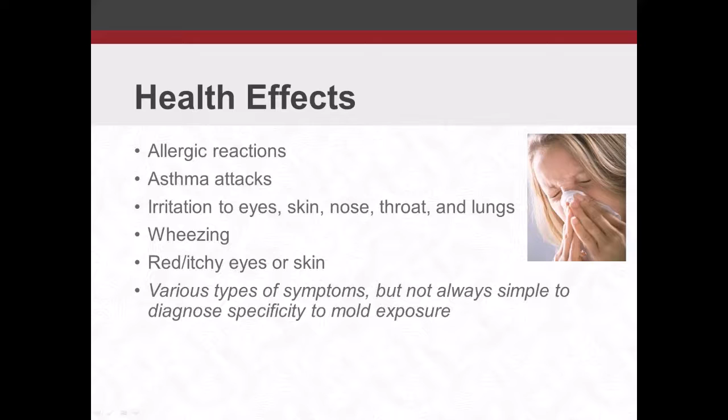So what are the common sources and causes? Mainly when looking at where you're going to get mold developing from, you want to take a look at the structure itself.

The number one factor is your building envelope, where you have that direct contact between your building systems and the outdoor environment, where you're going to have rain, precipitation, humidity, and all those things that can cause moisture or water infiltration. So obviously roof leaks, leaks at windows, doors, exterior finishes, things like that. Your foundation, if you have poor drainage or some infiltration to your foundation walls, that can lead to moisture and eventually a mold issue.

Or like your additions and repairs, those are common areas. Sometimes an addition is constructed on a building, so you've got the old structure, the new structure, and all those new connections where everything connects. If you get some differential settlement on that, you might develop leaks pretty easily on those areas of additions. So a lot of that depends on how things are constructed and how they're maintained.

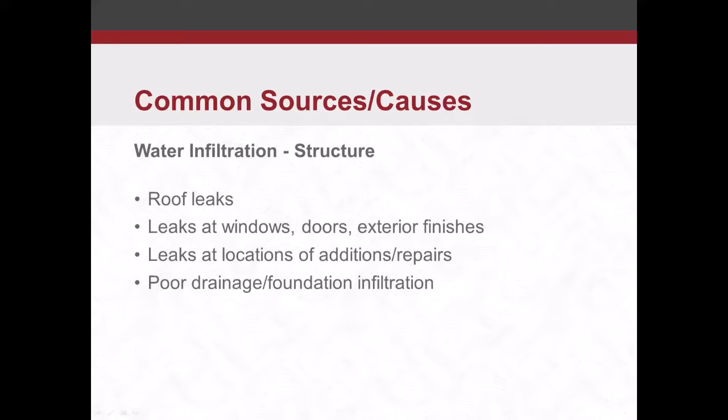Something that you can control based on, okay, if you develop issues, what do you do to fix it? Proper repair, proper maintenance, you can control those things. But there obviously is going to be a cost factor. You develop a roof leak, you replace a roof, that's going to cost. So definitely have to be aware of what we need to do to take care of the situation, and you got to be cognizant of that cost associated with it.

Another thing with water infiltration is what's inside the building: building systems, fixtures, furnishings. When you have pipe leaks, whether it be your mechanical hot water system pipes or your domestic water pipes with plumbing, obviously those can leak at unknown times sometimes. Those things are harder to control, but the main thing, if you do notice it, fix it as quickly as you can. Try to keep any water and moisture leakage at bay, and keep that mold from becoming an issue.

Also your fixtures, your toilets, sinks, tubs, washing machines. If you're in a building where you have water fountains, things like that, those can be a prime area for springing a leak. Refrigerators with water lines - I've seen a basement get totally flooded out when the owner was on vacation and the water line cracked and just leaked all over the basement. One little water line that feeds your refrigerator floods the whole basement out.

So there's extensive mold remediation on that project, and just some of those little things you don't think about, especially when you're leaving town. Okay, yeah, everything's good to go, lights are off, we've got everything buttoned up - but what about your refrigerator water line? You just don't think of things like that.

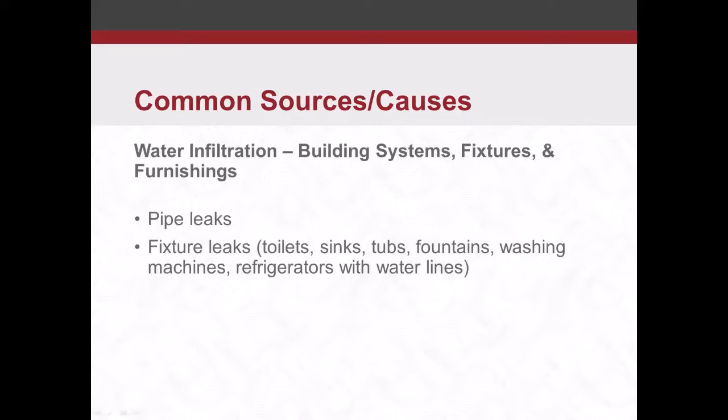Another thing with water infiltration, things that you can't necessarily control, is the forces of nature - hurricane areas, tornadoes, things like that bring water and wetness into a building. You can't really control it, but obviously it's going to be something that would present a problem for moisture and water infiltration and mold concerns.

And then you have some other things that are a lot more controllable with human error, but things happen, people make mistakes, and you have to have corrective action for that. One thing would be if wet items are brought inside - you're outdoors on a rainy day, you got wet clothes, you bring them in, take them off, leave them in the corner in the bathroom or laundry room, and those wet clothes don't dry immediately. So they sit there, they might get other building materials wet, and next thing you know, you have some mold concerns in that localized area.

Also, flooding events don't necessarily have to be from natural disasters. They could also be from human error, whether someone put something down the toilet and it overfilled and didn't get taken care of promptly, or you left the faucet on and it overfilled, drained down into below your sink, below your floors, into your subfloor. That can definitely make a mess in a hurry. So human error is also something you have to watch out for with this water infiltration.

Another item I got in there: improper use, placement, or installation of items with water inside. So people might get the idea, let's put a hot tub inside, let's put a large aquarium inside. But if you don't install them correctly, don't maintain them correctly, and don't have the right place for them that can control humidity and condensation, you're just asking for a disaster. So whenever you get the idea of doing something like that, you want to make sure that you have everything under control, and the area you're putting it in is properly set up to handle that.

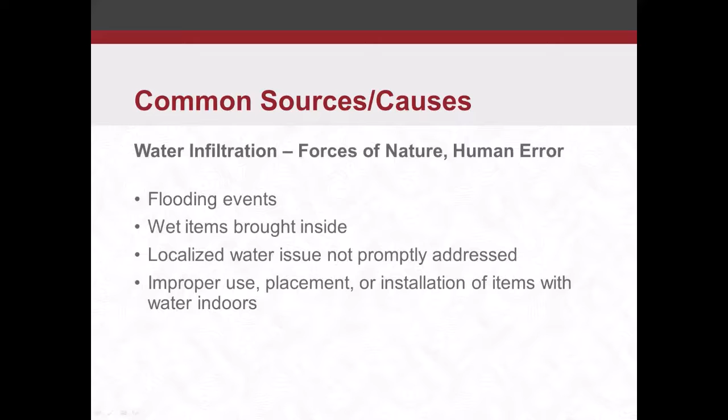Another common source is humidity and limited ventilation. A lot of this depends on the region where you live or where your building is. Certain areas of the country have a lot more humid days than others. So if you're living in conditions with high humidity over an extended period of time, you want to have buildings that are properly air conditioned and can reduce that humidity level inside and maintain it at a reasonable level. Ideally, you're looking at a relative humidity somewhere in the 30 to 50% range.

Those are ideal conditions. You get too low, it becomes a comfort issue - dry skin, chapped lips, things like that. So you don't want to be too low. You want to have a little humidity, but you don't want to be too high either, because high humidity is going to get mold growing. Once you get around 60%, that's when you get those ideal conditions for mold to grow. So 30 to 50% is ideal, but definitely try to keep it under 60%. If you run dehumidification systems and units, try to maintain it below that 60% level.

The problem with high humidity is usually it's coupled with limited ventilation - that's where you get some serious issues. If you have an attic area and it gets humid up there without proper ventilation, you're going to see your wood materials, your roof decking materials develop mold and mildew, because you have that limited ventilation combined with high humidity conditions.

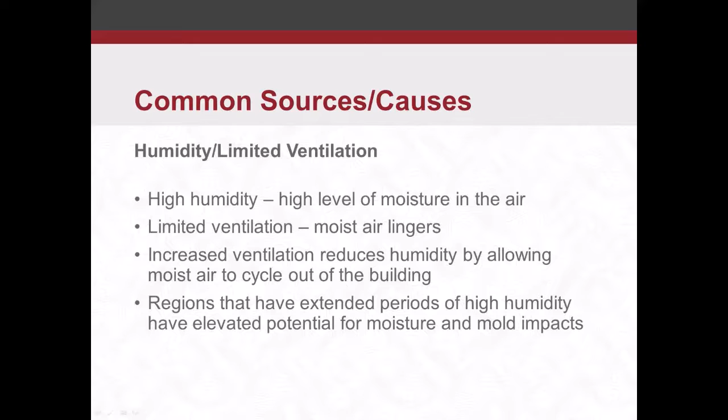Another source is condensation. Condensation is basically when your water vapor becomes a liquid - you get warm air colliding with cold surfaces, and then water droplets form on those cold surfaces. That all occurs due to your dew point temperature - the temperature the air needs to be cooled to in order to achieve a relative humidity of 100%. So your air becomes saturated, and that water vapor needs a place to go and form water droplets, condensing into liquid form rather than vapor form, and that's when you get an issue with condensation.

Materials in the building become lower than the dew point temperature, and you get water droplets forming on those. You're probably aware of seeing this in different scenarios - glass, metals, things like that, which naturally have a lower temperature than other materials. You see the condensation on those types of surfaces first.

It may not be an issue with mold growing on glass or metal, but those water droplets - say you've got a window unit with a wood frame - those water droplets are eventually going to make their way to the wood, and obviously your wood frame is going to be a little bit more susceptible to mold, and that's where you're going to see some mold and mildew type scenarios crop up.

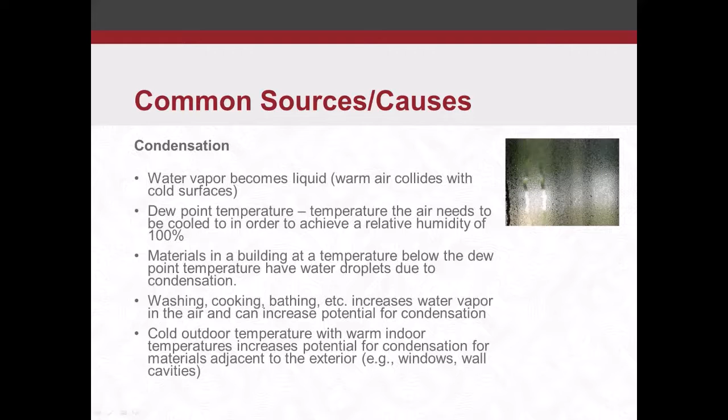Another source is plants and soil that you might have indoors. Indoor plants are good to an extent - you might have one or two plants in a room, office, or bedroom, and that's good, it helps CO2 levels and all that. But when you get to a point where you have 10 or 12 plants in a room, that's probably not a good scenario, because you've got a lot of these living plants in your area that can have decomposing leaves, and they can have issues with the soil and all that.

When you're looking at plants, there are a lot of sources for which mold or fungus can grow - one being overwatering. If you overwater a plant, all that excess water is just a good source for mold and fungi to soak up and grow. If you have poor drainage out of your plants, if you don't have some holes in your plant pot so that excess water can flow out, then it just creates that breeding ground there.

Also, decomposing leaves on a soil surface. If you don't clean out the dead leaves every now and then, those can decompose and create a mold growth issue. So you want to keep an eye on those plants if you do have them in your indoor environment.

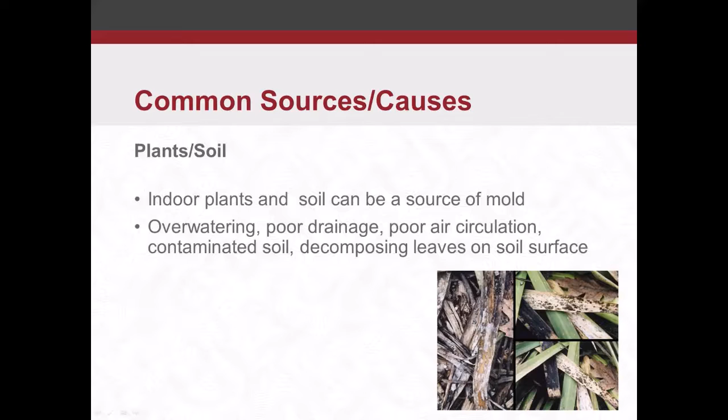So as far as once we do have a source, where do we typically see mold issues? Commonly, we're looking at locations that aren't readily exposed to view. You don't see them every day, out of sight, out of mind. Things happen behind a wall, above a ceiling, down in the basement, up in an attic. You're not really looking for it every day.

Or areas where you're not routinely cleaning or maintaining. You might have dust, debris, so a little more food source for mold to grow. Or you get mold spores in an area, you clean them up routinely, you might not have an issue. If you don't clean them up routinely, you get a little dampness, then you have an issue.

Or areas with poorly conditioned air. That's very common as well. You don't have that good air circulation. The humidity builds up at different periods of time, and you get the issues with mold, the potential issues.

So we're looking at pipe chases, wall cavities, attics, basements, crawl spaces, mechanical rooms. Not only are they maybe not necessarily cleaned and maintained all the time, but also they're warm. If you've got a boiler system or furnace system, they're going to produce heat. So now you've got high temperatures. If you introduce some water, condensation, humidity in there, you've got a good breeding ground for mold.

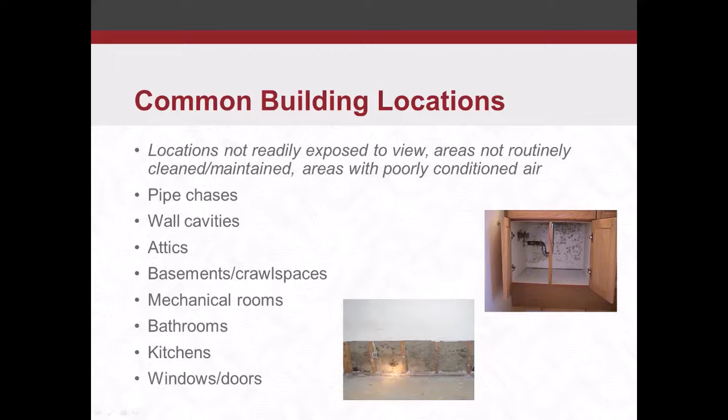So that brings us to question number 1.

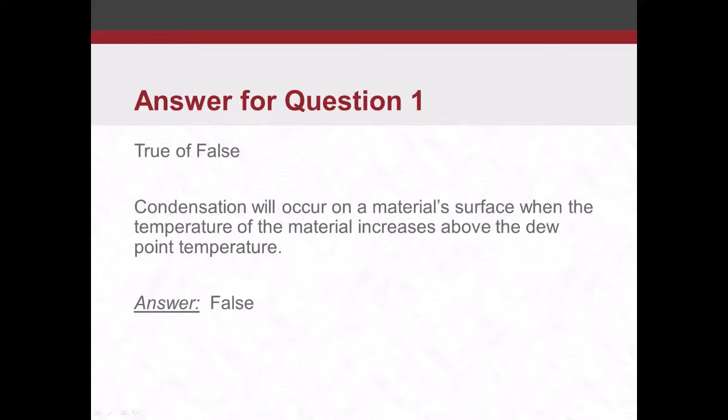Cheyenne, please continue. Okay, question number 1 was true or false: condensation will occur on a material surface when the temperature of the material increases above the dew point temperature. That is false. It's when the temperature is below the dew point temperature.

All right, so when we look at trying to control or mitigate mold, or have general concerns with mold, where do we look to address these issues? What guidelines do we have available to us? On the federal level, there are a lot of different agencies that have prepared guidelines for mold-related effects. OSHA has some worker and employee protection type scenarios, so they have guides for mold.

The EPA has some guidance. The IICRC, Institute of Inspection, Cleaning, and Restoration Certification, they have some guidelines. New York City Department of Health was one of the first to actually come out with guidelines for addressing mold in buildings. They were a precursor to a lot of other guidance that came out after that.

But what you see on the federal level is a lot of guidance, just providing some helpful information for the end user to try to keep mold from becoming an issue, and to try to protect themselves. There's nothing set in stone. There are no regulations that say this is what you have to do, or this is the standard you have to clean things up to. There's none of that, and there likely never will be.

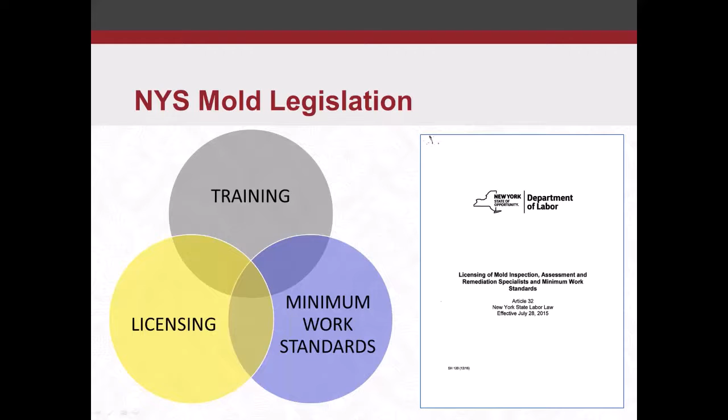So the New York State mold legislation defines a mold project as mold remediation, mold assessment, or mold abatement of areas greater than 10 square feet, but it does not include routine cleaning or construction, maintenance, repair, or demolition of buildings, structures or fixtures undertaken for purposes other than mold remediation or abatement. So what that means is, if you're hiring someone to do specifically mold remediation or mold assessment, this legislation applies. If you're doing a renovation project and they happen to find mold in there, this doesn't apply.

The contractor can remove that mold. It doesn't have to be a licensed contractor. They can remove it and continue on with the renovations. This doesn't really apply. You can write into a project that you want it to apply, and you still follow all these requirements, and that's fine. But in the run-of-the-mill case, this legislation only applies if you're designating the project specifically for mold remediation and hiring someone to do that.

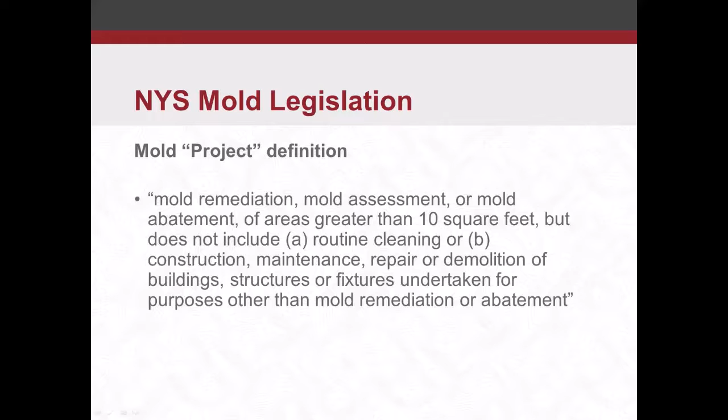So when we talk about minimum work standards, they define minimum work standards for the assessment, the remediation, and the post-remediation clearance. On the assessment side, the end goal is to have a mold remediation plan. The mold assessor does your assessment, so they're licensed as an assessor. They come out, look at the area, do the visual, do the full assessment, and come up with a mold remediation plan to give the owner, saying this is what should be done to address the mold at this building.

So the mold remediation plan, the components you see here are the minimum requirements of that plan. The assessor has to identify the areas of work, the estimated quantities, and the methods that should be used to remediate each area of impact. It should also suggest the PPE that should be used. So if the assessor feels there's a need for respiratory protection when dealing with it, they should state that as such.

Proposed clearance—what do you do at the end? How do you certify that the work was done? The assessor needs to identify how that goes down. Notifications—how do you notify building occupants? Again, none of this is set in stone, like you have to notify occupants 10 days in advance. That's the assessor's call.

They could say, let's notify them 3 days in advance. And how do we do that? Well, we're just going to put a sign up on the door. That's part of the mold remediation plan—that's what needs to be done. Also, an estimate of the time and cost to complete the mold remediation. If you can identify the underlying source of moisture, that should be in the plan. This isn't a requirement where you have to go out of your way as a mold assessor to look at every nook and cranny to identify the source of moisture, but if it's obvious and clear and you can identify it, they do expect that to be told to the owner.

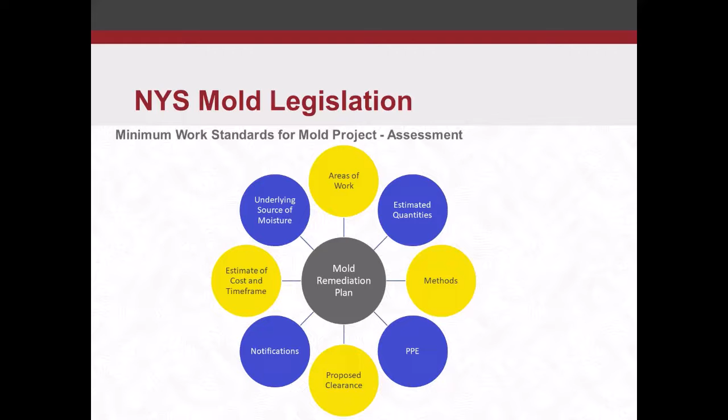On the remediation side, there are minimum work standards too. They have to prepare a mold remediation work plan. This is different than your mold remediation plan—this is the work plan that the contractor sets out that they're going to follow. So what you'll see a lot of times is they create a work plan that pretty much mirrors what that mold remediation plan has. That way it's a seamless transition, and you're not going against anything the assessor thinks needs to be done. But they may also add some things in, like, okay, we'd like to use this on top of what the mold remediation plan says. So that's usually fine.

It's when you get contractors coming in with a work plan that doesn't fully meet the minimum criteria in that mold remediation plan. That's when you might have an issue where the owner wants to say, hey, you're not meeting what the assessor wants done. We need to have a discussion about what you're actually going to do here and if you're the right fit for the job.

PPE, they're going to specify what they're going to use for PPE. Again, it should follow the minimum in the mold remediation plan, but they may want to use more for their employees. If the mold remediation plan didn't call for respiratory protection, maybe the abatement contractor says we want to use respiratory protection. This is what we're going to use.

So, and that's fine. They're going to specify the type of containment to prevent the spread of mold, and they're going to maintain that containment until there's satisfactory clearance. Signage, display signs to advise that a mold remediation project is in progress.

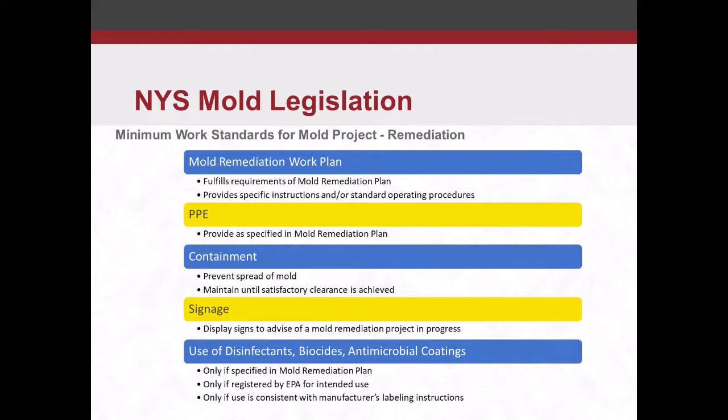Then also on the minimum work standards, there's a minimum work standard for your post remediation assessment and clearance. Obviously, you want to determine whether the area is free from visible mold. That's the end goal, we want to get that mold out of there. But also make sure you determine if the work has complete compliance with your remediation plan.

So it's not only, okay, let's take out materials with mold and move on. The remediation plan may say, okay, we're going to take out the materials that are obviously visually impacted, but we're also going to clean the area. That's typical, so I want to make sure they did go ahead and clean the remaining surfaces. We don't want to leave those dirty and tear down the work area and move on. That's all going to be part of your post remediation assessment.

And to the extent feasible, you want to determine that the underlying cause has been remediated, or make a recommendation as to the type of contractor who could remedy it. So again, the whole intent of the mold remediation program is not specifically to assess and address the source of the moisture. That is the ideal situation, that you can kill two birds with one stone.

But it's not expected that a mold assessor or mold remediation contractor is going to be qualified to go ahead and fix up and patch and repair any of the mold sources. So if you have a roof leak, they don't expect the mold remediation contractor to be a roofing contractor to go up there and fix the problem for them. That might have to be something that's done after the mold remediation.

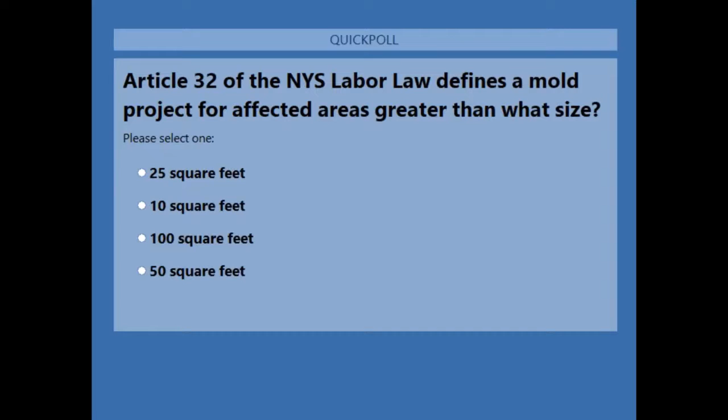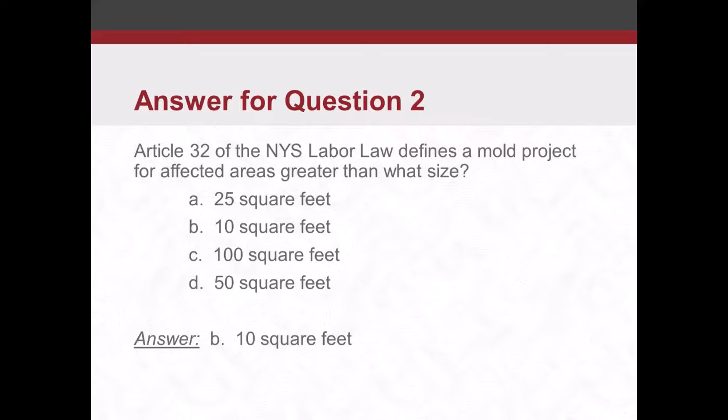Okay, question 2. Article 32 of the New York State labor law defines a mold project for affected areas greater than what size? Per the definition, that is 10 square feet. Answer B.

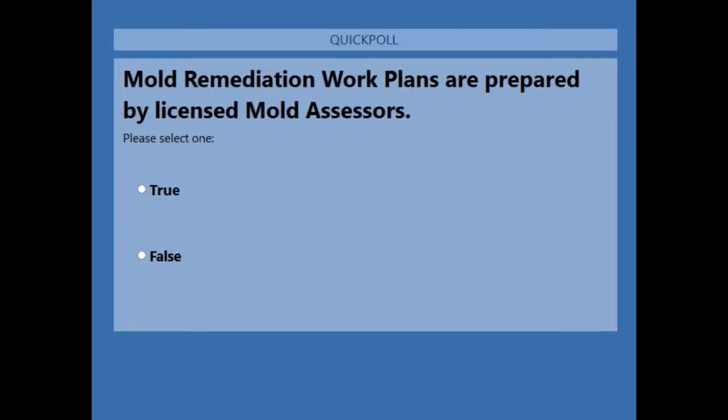Okay, question 3. True or false? Mold remediation work plans are prepared by licensed mold assessors. That is false. It's the mold remediation plans that are prepared by the assessors, and then the mold remediation work plans are prepared by the remediation contractor.

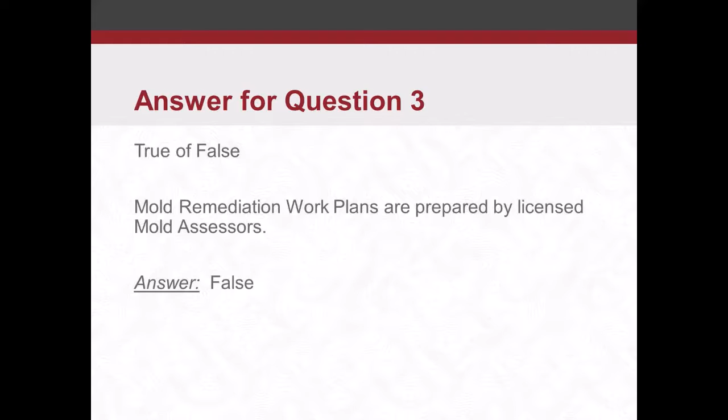All right, so going back to the mold assessment, some of the minimum things that need to be done are your visible observations. Obviously, if you see it, you need to identify it. Visible water sources, if there's an obvious leak or water infiltration or moisture issue, identify that. And then, looking at the building materials that are impacted and identifying the locations and the size of those impacts.

Some additional things you might do during a mold assessment is utilize different technologies and resources, such as moisture testing, infrared camera, particulate monitor, destructive assessment where you're actually removing some materials and getting in behind wall cavities and such to get better observation, and then possibly sampling.

So none of these things are specifically required, but they do have their value in certain scenarios. You do have to know what you're getting into, or what you're looking at.

Sometimes with moisture testing, it's not like you can just go out and get a meter to test every different material in a building. They're really only set up for certain materials. Gypsum board, you can test wood, you can test concrete. Basically, you got to have a baseline to compare it to. So if you have a material, you can't go plug it into a ceiling tile and say, okay, we're going to be able to compare it to a baseline level. There's really nothing out there for that. But like gyp board and wood, you have those levels you can compare to and see if they're in what you'd consider a dry condition, or a condition that wouldn't promulgate mold growth, or if they're in a wet condition where, if you have an issue with mold, it could continue to be a source of a problem.

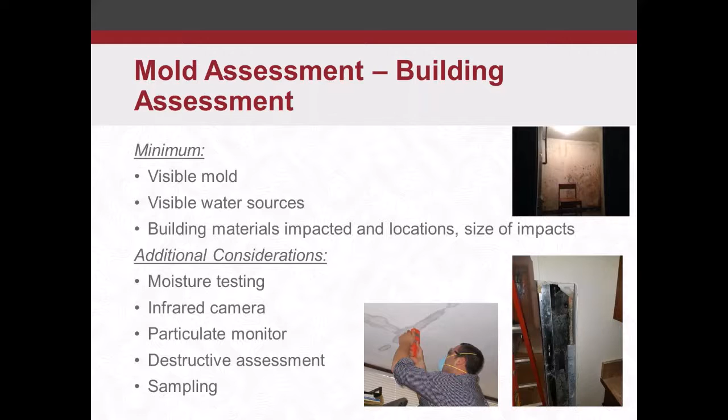Sampling - all the regulations, guidelines - sampling is not a requirement. It's not even a recommendation a lot of times. What it is good for is a little bit of comfort to the occupants or the owner, that okay, let's take a look and see what we have for this discoloration that we see on the wall. Is that mold? A mold assessor could probably look at it and say, nah, it's not mold, it's this or that. But sometimes it's comforting to know that we took a sample of it, we had it analyzed, and here's the results. And as expected, it's not a mold issue, or lo and behold, it is a mold issue.

Then you look at air sampling again - nothing that's really required or recommended, but it's comfort for the owner, occupants. Okay, what are we breathing in? Doing an air sample could be good and bad, but you definitely have to know what you're looking at. It's a little bit subjective in that you're usually comparing indoor results to outdoor results. But if you're sampling during colder months, your mold spores outdoors could be pretty low, and you could have higher mold spores indoors. To the layperson, that may look like an issue, but to someone who's done a lot of air sampling, if it's still relatively low levels and we're not seeing any mold, it might be a non-factor. So you really have to know what you're looking at when you do the sampling, or you commit to the sampling.

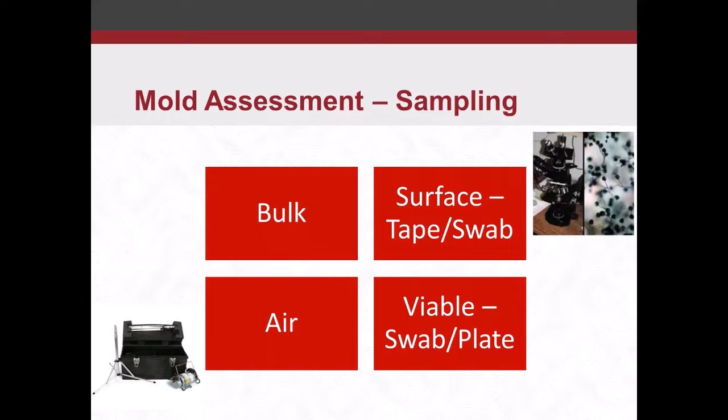So again, looking at your air sample results, you want to make sure you know what you're looking at before you just go out and, carte blanche, make some judgment calls on it.

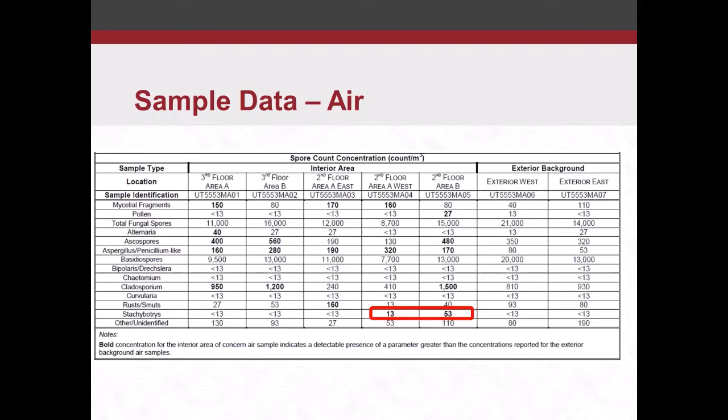Your tape lift samples—this is where you would actually take a piece of transparent tape, put it on the surface, put that in a Ziploc bag, and send it back to the lab. They put it under a microscope.

It's not a scenario where they can give you counts like they did on the air samples. They're basically going to give you a qualitative analysis—so different mold types, whether they're not detected, or light, moderate, or heavy levels detected.

Something like this, you might see light levels and say, 'oh, I got mold.' Well, you're going to get mold—mold's going to be present anywhere. You can have mold spores that just naturally settle on surfaces.

Those light levels—unless we're dealing with something like Stachybotrys, which isn't the case here, but basidiospores and other unidentified types—you see light levels, okay, probably not a big deal, especially if we're not visibly seeing any discoloration or anything to that effect.

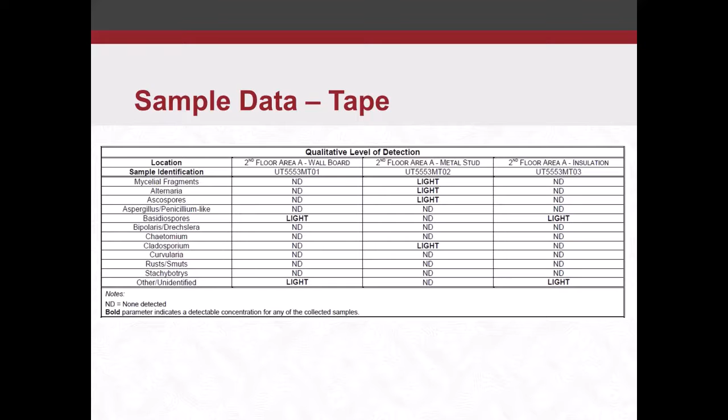You start getting into the moderate or heavy levels, then you start questioning whether we probably have an issue. Chances are, if you took a sample and it came back heavy, you probably saw the mold there to begin with—you're just confirming what type you're dealing with.

All right, question number 4.

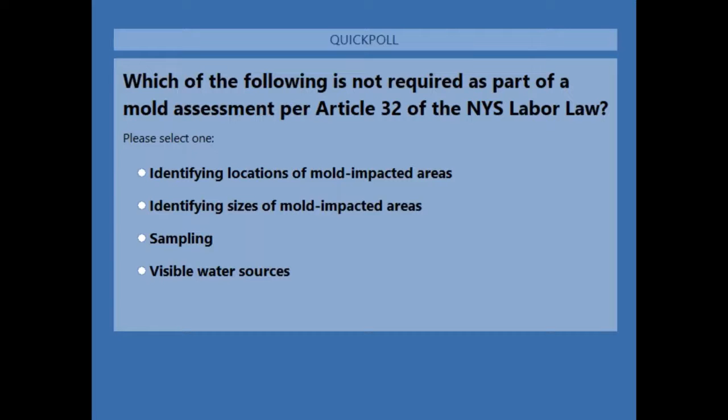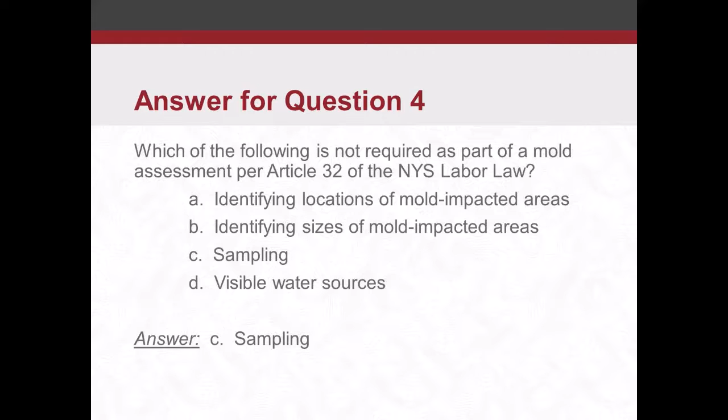Please continue, Cheyenne. All right, which of the following is not required as part of a mold assessment per Article 32 of New York State labor law? That's our mold legislation in New York State, and the answer is C—sampling is not required.

So, mold remediation—now we get into how you do it. What do you do?

Generally, you're looking at trying to contain a work area, trying to limit it from spreading during the removal and cleaning, and then you're either cleaning surfaces or removing and replacing them eventually.

Now, when you look at how you contain a work area, there are several options. You can have no containment if it's a real small, localized area, or you can just contain the source—maybe put a piece of poly over an affected piece of sheetrock or gypsum board wall.

Then you cut outside of that poly, take it off, and throw it out. So that would be a scenario if it's a small localized issue—no containment is probably satisfactory.

You get into some larger areas, you might go with a limited containment where you're just putting up a single layer of poly, maybe a pop-up tent, doing your work, cleaning, clearing, tearing down the tent, and moving on.

Or you've got a real big issue, you're looking at a full containment system—something you might liken to a containment for asbestos abatement—where you have two layers of polyethylene sheeting on the surfaces that aren't affected.

Putting in a negative air machine to filter air out and all that. So you can really have a full gamut of different containment systems depending on what you're dealing with.

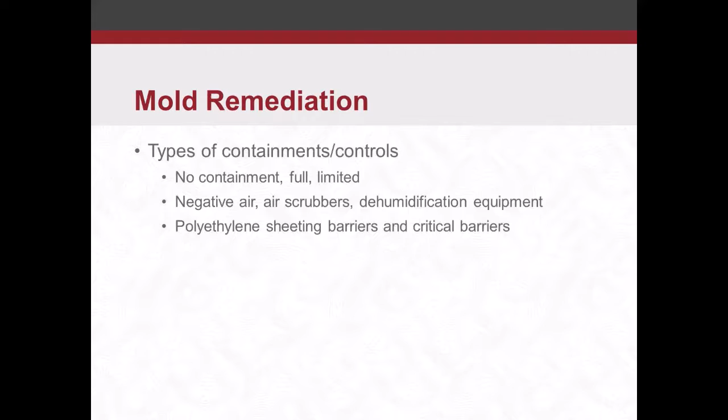So the methods and treatments, a lot of what you'll see is cleaning and remediating those surfaces. Sometimes you can use a disinfectant that will help, and sometimes you just have to remove the material. If you're talking about those porous, absorbent type materials, gypsum board, sometimes your wood materials, carpeting, the easiest thing is to get rid of them. It's going to be very hard to clean, and even if you can clean it, there's no guarantee it's not going to be a recurring issue. So a lot of times you're left no choice but to remove and replace.

But some surfaces you can clean with soap water, detergent water, or some sort of cleaning chemical - wet wipe, damp wipe, HEPA vacuum. Once you do your wet cleaning methods, obviously you're going to want to make sure those surfaces dry in a reasonable time frame. So you might have mechanical drying methods inside your work area to dry those out after you clean them, keeping them from staying wet and moist.

Abrasive methods will be useful if you have issues on concrete. Now, mold's not going to grow directly on concrete, but if you have dirt and debris on your concrete surface, it can obviously grow on that. So you might have to use wire brushing or sanding to get that off. Or if you have wood joists or structural wood materials that you can't remove and replace, you might use an abrasive type method like sanding or media blasting to remove material from that wood, so you can keep that wood surface. A lot of times what you'll see is trying to get the surface mold off the structural wood, and then if you can get it to a point where it's in good condition, put a sealant on it, so hopefully that'll prevent any further issues on your structural wood framing.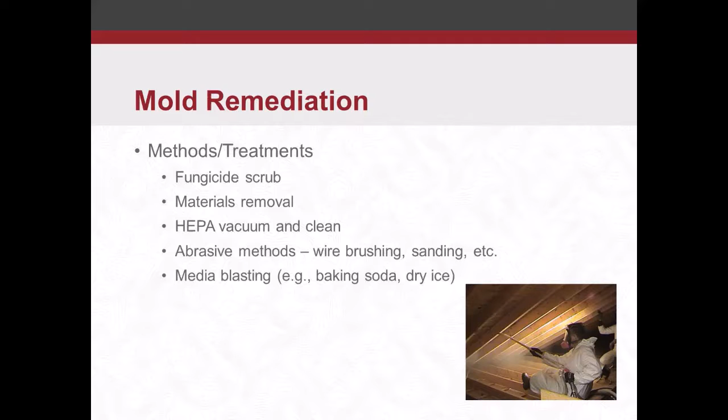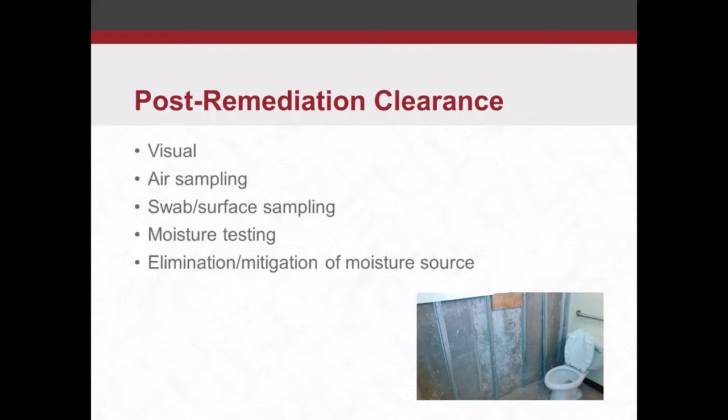The post-remediation clearance - went over this a little bit earlier - but doing a visual, that's number one, you've got to do a visual. You may do some sampling, you may do some moisture testing, and you want to look at whether you've eliminated or mitigated that moisture source. If the mold remediation contractor was able to do that work themselves and mitigate it, that's great. But if not, you're letting the owner know that, hey, we got the mold remediation done today, but you still have this water source that you've got to take care of, and the sooner the better, or you're just going to be back to square one.

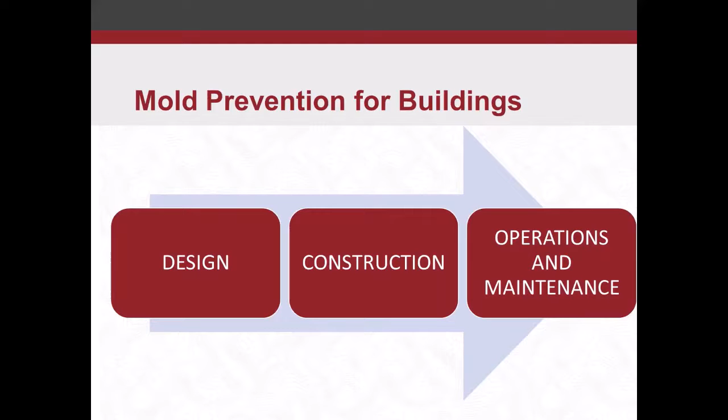So ultimately, the best thing to do with mold is to try to prevent it in the first place. And how you do that really is a combination of design, construction, and building operations and maintenance. If you don't design a structure well enough to keep water issues out, you're just going to be fighting it the whole life cycle of that building. And if you don't construct it the way it's designed to keep that water out, again, you're still going to have issues. And then obviously there's the end user - you've got to operate and maintain your buildings, or it doesn't matter how well you design or construct it. If you're not maintaining it properly, you can have issues.

So when we talk about designing to limit mold, there's a lot of different factors that come into play. It all starts here at the design phase, but obviously site selection - you want to avoid flood zones. If you build in flood zones, you're just asking for problems. You might have to backfill to raise your elevations to get the elevation of your structure higher than the water tables and things like that. And then your structure types and features - you want to consider your local climate and environment. Is it a rainy climate? Does it have snow, ice, where you might have ice dams on your roof? You might have different parameters you have to design to with those situations, and you want to make sure you meet those parameters so that you don't have issues with water and moisture.

Foundation drainage - make sure you have good perimeter drainage and waterproofing. You don't want water to enter your foundation if you're in a high water table condition. You may also consider not having basement areas in high water table conditions. Obviously, if you don't have a subterranean floor or basement level, you're probably not going to have drainage issues into your living environment. But if you have that basement, a high water table, and you don't have proper drainage or waterproofing, then that's going to be a problem. Sloping away from the foundation - that's very critical.

You don't want ponding, pooling, standing water right up against your building. So good slope away from the foundation, gutters, downspouts, splash blocks. These are often installed right out of the gate, but maintaining them sometimes goes to hell.

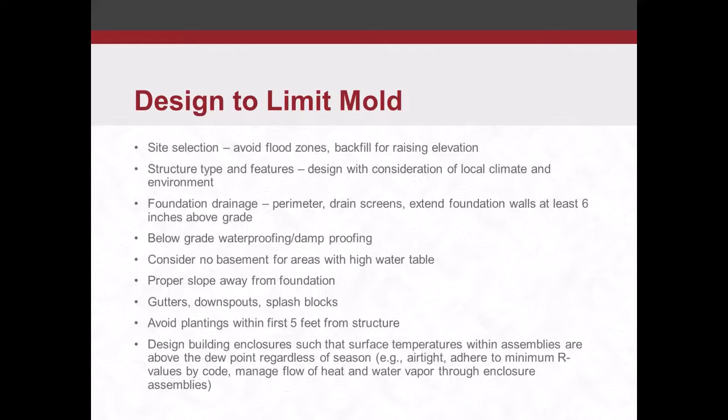Air barriers, vapor barriers, make sure you have appropriate air barrier and vapor barrier systems, and that you're putting them in the right locations, or designed to be placed in the right locations. An improperly positioned vapor barrier can have just as much detrimental effect as not having one at all, so make sure it's in the right location.

Capillary breaks keep water from wicking into a building. Not only do you have to worry about water leaking in with certain materials, you also have to worry about capillary action, water wicking up into concrete block and creating a moisture issue inside. So make sure you have good capillary breaks there.

Watertight systems, roof flashings, window flashings, sealants. Make sure those are in the design so you can seal those up nice and watertight.

Some other items: appropriate roof pitch and overhangs, especially if you're dealing with a climate that has snow. You want to make sure you don't have too flat of a roof. That snow is going to sit there, you might get ice dams, things like that, and you can't properly direct that water away.

Ventilation, exhaust for kitchens, attics, bathrooms—good exhaust. HVAC systems should be designed to properly control humidity, both in heating and cooling modes. You could have issues either season, so make sure your HVAC is good.

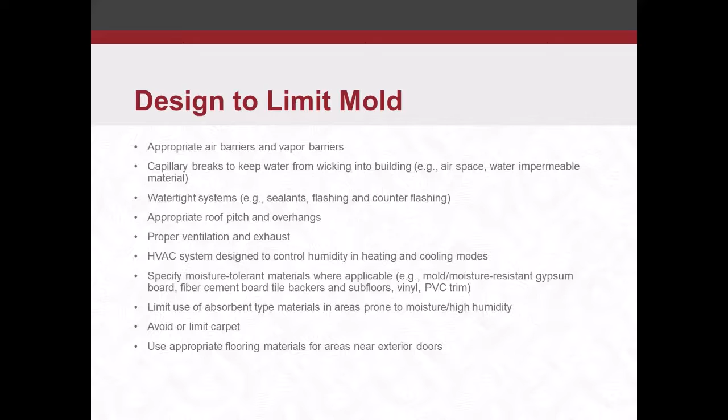Not gonna be an issue. Make sure you use floor mats, things like that.

All right, construct to limit mold. First and foremost, it's very important during the construction phase that the design parameters are understood, so you understand the intent and design features related to moisture and water control. This isn't always satisfied, but the more the contractor is in tune to why they're doing something, the better off they're going to be able to install it, and more successful it's going to be. So that is a key component that may often be lost.

Appropriately, just doing the construction itself, make sure that slope and grade works out the way it needs to be. Properly install your specified materials. There may be some other alternatives, but make sure the designer's aware of scenarios where you might want to use something different and they approve of it, because there may be a reason why they specified a certain material.

Avoid cutting holes in air barriers or vapor barriers. This might be a common issue if you have say a sub-slab vapor barrier, especially when you're placing concrete. You have a little extra water from your concrete, so sometimes you're compelled to cut a hole in that vapor barrier just to let that water seep out below it. That's not a good idea. Now you're creating that avenue for moisture to come up, and it will find that one hole.

You don't think about it when you're constructing, but if you put a hole in a vapor barrier, vapor's going to find its way up through there, especially since it's easier to come through there than it is to go through the subgrade below.

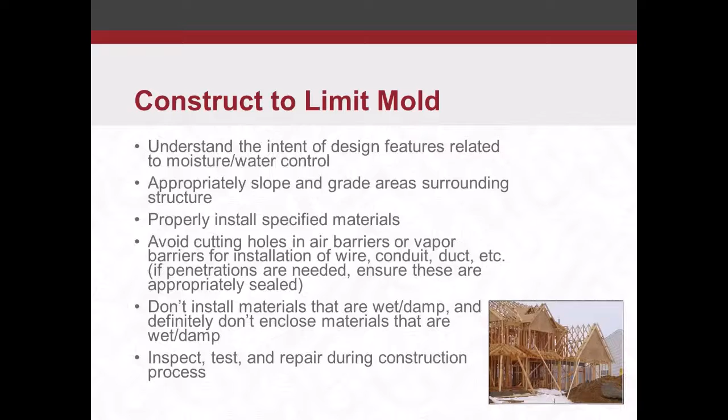The final phase of the process, maintain to limit mold. Again, when you're maintaining a building, you want to understand the intent of those design features. You want to understand how things are constructed so you can properly control water and moisture. You want to do regular inspections and O&M, involving your HVAC, plumbing, drainage, attics, basements. Inspect those, have a periodic inspection schedule, make sure you don't have any water issues.

Any cracks that might develop, seal those up, seal any openings up. Sometimes certain surfaces you want to paint or seal, have a mold inhibited paint or mold inhibited sealant that will help your scenario or situation there.

Keep your building materials dry, mitigate. If you do have a water issue or leak or overflow or something like that, make sure you try to get that taken care of within 24 to 48 hours. Once you get past that 48-hour mark, that's when your mold starts growing. So try to clean it up immediately.

Dehumidifiers when applicable. Storage of materials. If you're in a basement area that's a little bit damp throughout the year, or you have a dehumidifier in there to try to control humidity, it's not a good idea to put absorbent materials down there. You don't want to be storing cardboard, papers, things like that, because they're just going to soak up that moisture and create mold.

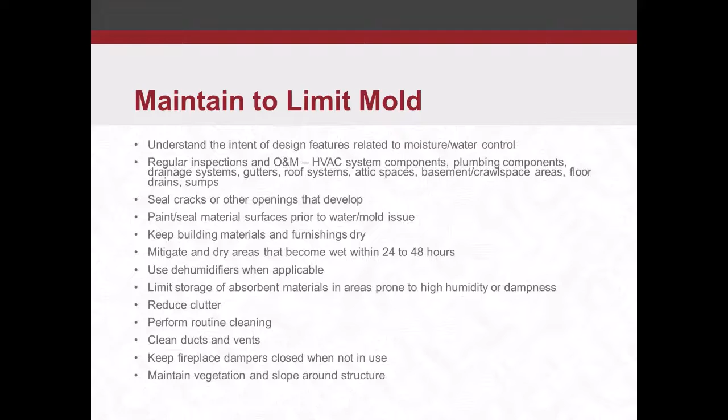Reduce clutter in general. If you have a lot of things in a room up against walls, you're creating locations where you could get condensation, dark, damp locations. Routine cleaning of ducts and vents. Fireplace dampers, keep them closed when not in use. And maintain your vegetation slope around the structure, make sure things don't get out of control. Or your gutters and all that, make sure everything's in good working order.

So with that, we have question number 5.

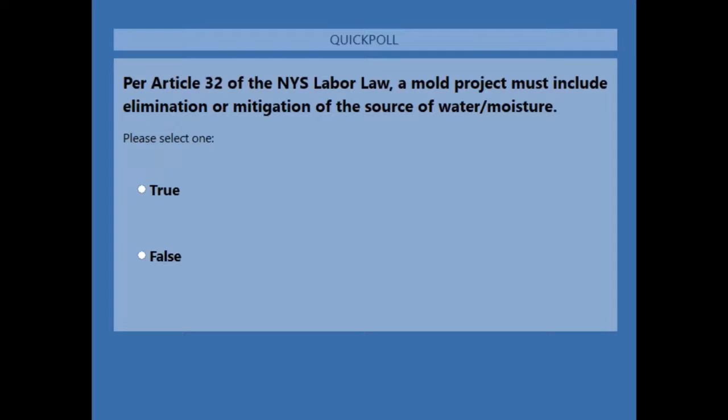Please continue, Cheyenne. All right, so question 5, true or false: per Article 32 of the New York State Labor Law, a mold project must include elimination or mitigation of the source of water and moisture. That is false. It's ideal if they can, but not a specific requirement for the mold remediation folks.